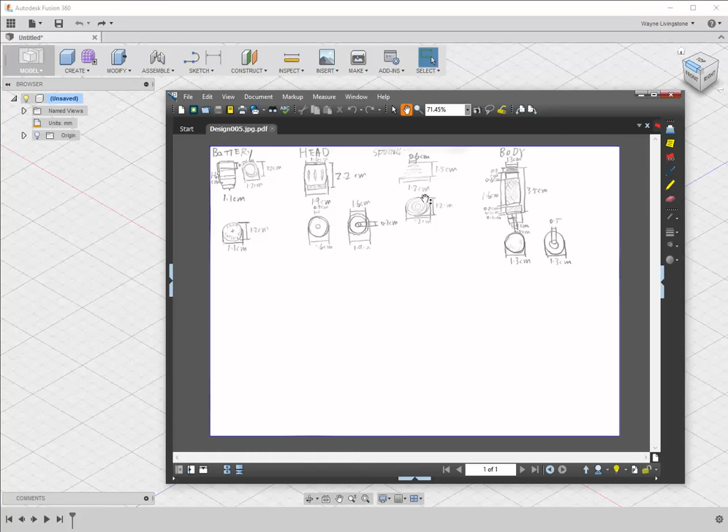So you can see here it's got the battery section here, so the side view, top view, head, and it's got all of the dimensions around it, spring, body, etc. I'm going to start for this video just on the spring. Okay, so I'm just going to zoom in a little bit on this one, move that down a bit. We're really going to focus on these dimensions here that have been drawn in there so that we can create our spring. So I'll just put this a little bit to the side for now, and then we'll come back to that in a second.

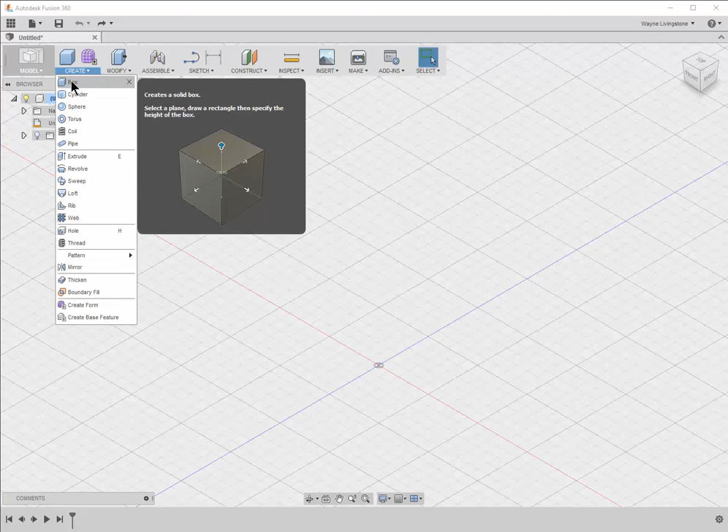Now, oops, I'll just take that out a little further. First thing we want to do is go to this little section here where it says create. So here you've got objects that you can choose. They're called primitives. So you've got a box, a cylinder, sphere, torus, etc. Coil. Coil will be what we use very soon to create the spring. And there's a lot of great things you can do in this program that SketchUp really doesn't quite come close to. So that's in the create menu here.

You can change things later on if you make a mistake. You can do assembly. You can just draw freehand using the sketch feature. You can measure elements, and then later on we can 3D print these. So this menu mainly will be sort of using these two sections here, I guess, and possibly the sketch section. On the right side of the screen here, you'll see there's a little orbit tool. So I'm just going to start by, I'll just create a little box on the plane here. Doesn't matter really about the sizes.

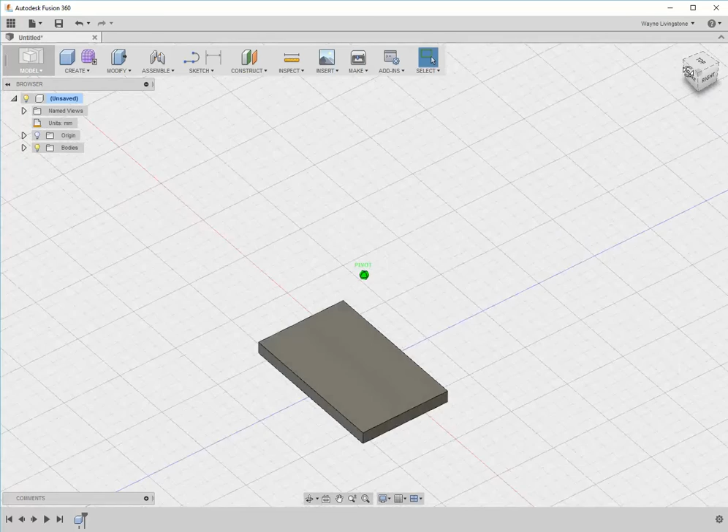That's good for now. So here you can grab a section of that cube at the top right and orbit around. So it's pivoting around that point, or you can say, no, I just want to look at the right hand side and click on that and go to the side, or no, I want to look at the left hand side. No, actually changed my mind and now I want to look at everything nice and close in an isometric view. So that's quite handy. If you ever get lost, click on the home button and that takes you back to your main drawing.

Down the bottom here you'll see there's different ways of moving around your drawing space. Panning is obviously just sort of grabbing and moving left to right. We're not doing any scaling, and we're not doing any orbiting. That's this tool here. So orbit, you can see then we can just get that around, and sometimes it's sort of a little bit confusing when you have got a complex drawing. So I'm just going to click on the home button and that will take me back to an isometric drawing, and I'll zoom out a little bit. I'm using a mouse, so I'm just using the middle scroll wheel there.

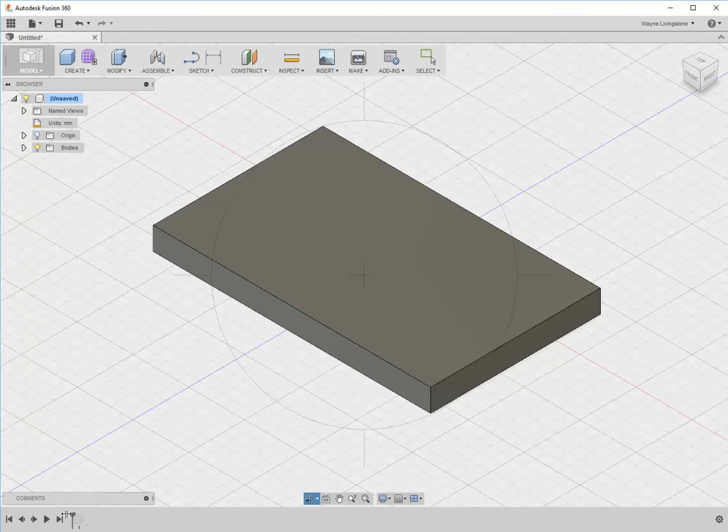Down the bottom here is basically the steps that you've taken. So if you make any errors, you can go back a step and get rid of that and start all over. You can do it that way, or you can just use the back arrow key. But this one down here just does it as a timeline, and you can sort of play through the timeline and see the object getting created.

We won't worry too much about that for now. Right, let's start with the spring. So we go to create. We're going to do a coil. Now, in Fusion, it wants to know what surface or what plane you want to start drawing on. So if we look here at our surfaces, we basically want to draw looking down from the top.

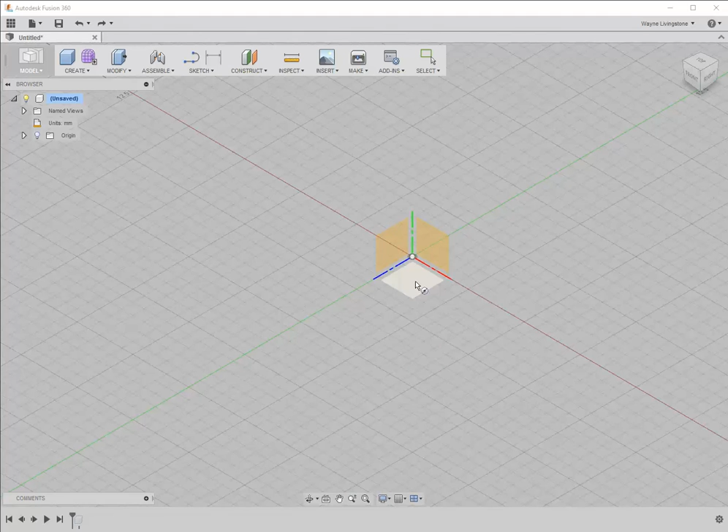So I'm just going to click on that one there. So it would be like a side view, left side view, right side view, I guess. So we're going to click on that and we're going to say, well, we just want to draw on the base. So we'll start from the origin. The origin is just the intersection of your X, Y, Z planes. The actual diameter that we have was 12 millimeters.

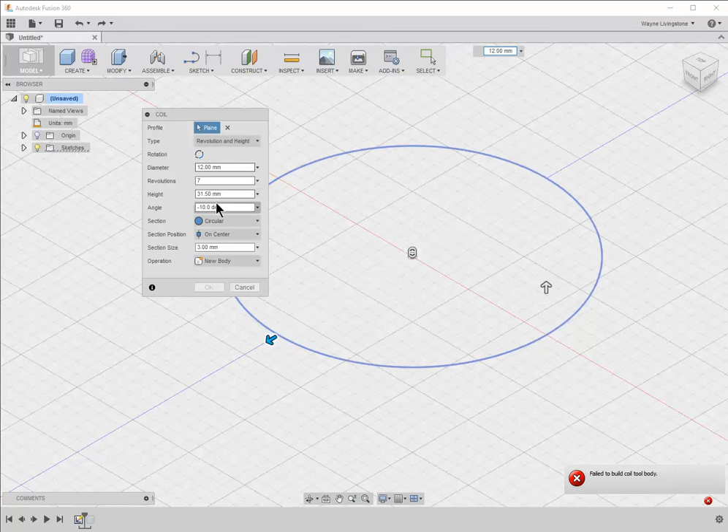So I'm just going to press enter there, and here it brings up now all of the information that we need to be able to create a spring. Now, just judging, I'll just bring this drawing back here. So I'm just going to put that there for now. At the moment, I've got a diameter of 12, and that's 1.2 centimeters. Okay.

Revolutions is just how many times it goes around here, up to the top. So we've got 1, 2, 3, 4, 5. So we'll just change that to 5. I'm assuming this is accurate. Maybe best to take a look at the spring again in class. The height we've got is 1.5 centimeters. So I'm just going to change that height here to 1.5 or 15 millimeters.

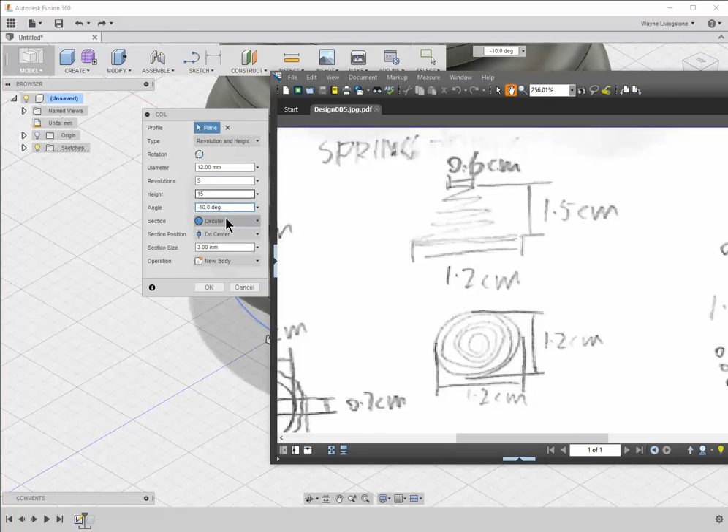And minus 10 degrees. So basically, it's tapering in here on the spring itself. We could measure that with a protractor to get it absolutely perfect. For the purpose of this activity, though, we'll just choose minus 10. Now, I'll move this to the side because what we're seeing now, if I just zoom out a little bit, is a really fat spring and it doesn't really look like what it's supposed to.

So at the moment the diameter is correct, which was this blue circle here, the 12 millimeters. It tells us our height is 15. We've got our 5 coils, 1, 2, 3, 4, 5. And we've got it tapering in. If we had that as not a negative but a positive, then you can see it tapers out. So we want it to taper in. So we just put a little negative sign there, and you can see that pulls it in.

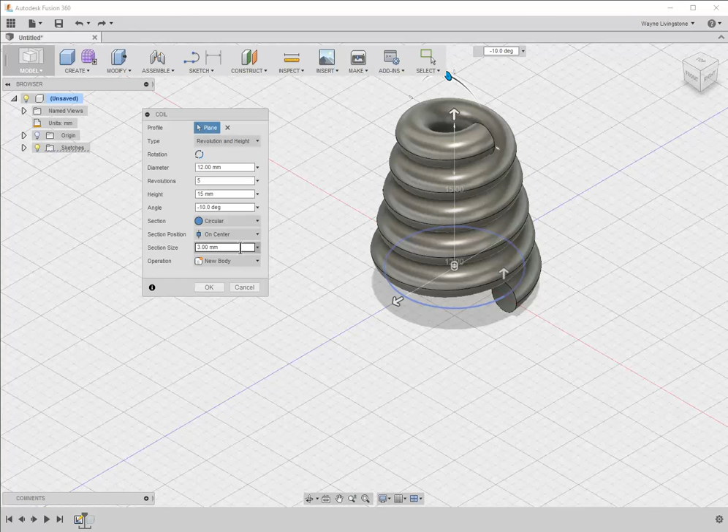Now, we want the section to be circular. You can also do like a square type spring if you wanted to, but it looks a little ugly and it's not really how a spring should be. So we're just going to keep it like that. Now, we put the millimeters, let's put that down to 1 millimeter. And that looks a little bit more like the spring that appears on our sketch. So we're going to make this a new component, and we just click OK, and that's our spring.

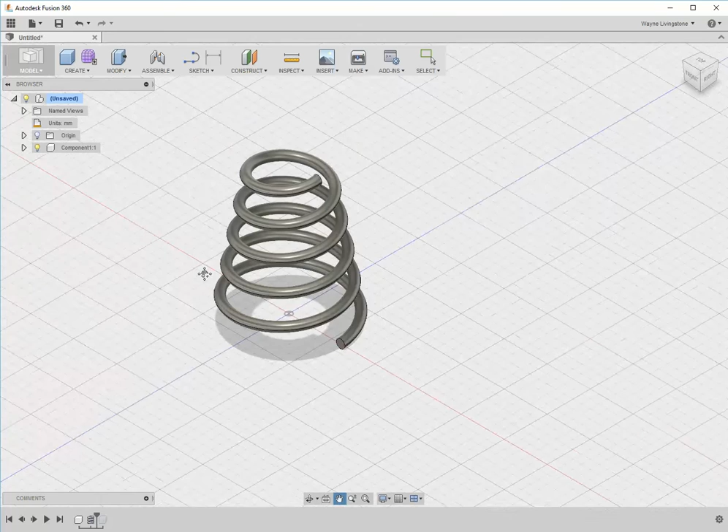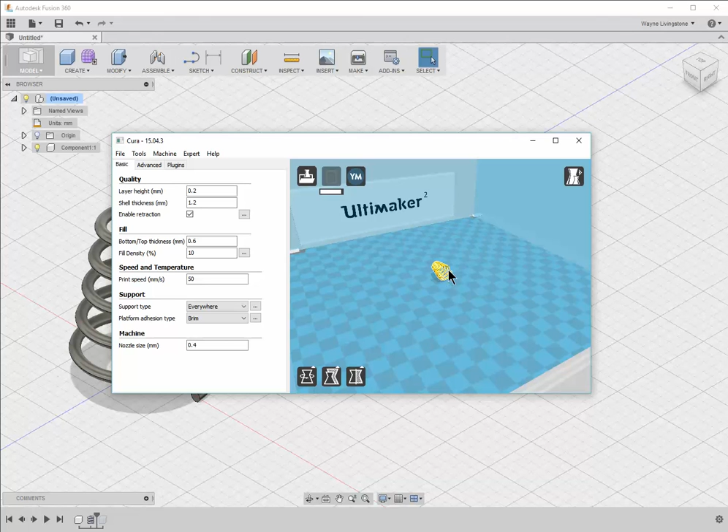And then what happens is it brings up the 3D printing program. In our case, we use Cura, and you can see it's quite small there. If I zoom in, there's our spring, and if I were just to rotate that, for example, ready for the 3D printer, it's going to take us 4 minutes to print that out. And so we would just go File, Print. Too easy. So that's the process of creating a spring in a very simplified format. So that's it. We'll do that for each component.